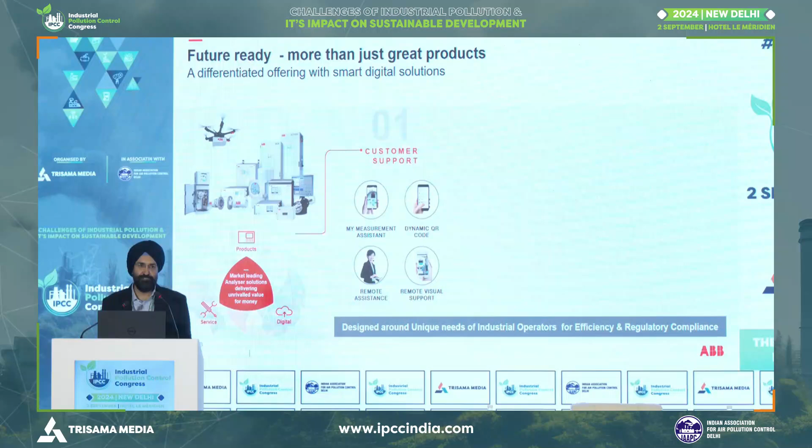You could dial into the equipment and do the diagnostics. There's a measurement assistant which uses generative AI in the background. You have a problem, just type it there, it gets you the solution from all our expert manuals which are existent there. So you don't have to make multiple calls. So that's one step in customer service.

Go on to data-driven solutions. We have talked about emissions. There is also a terminology called PEMS, not like CEMS, predictive emission monitoring. We also do that. So it should be part of the regulation. A lot of countries have this where you do not have to install a device, but using softwares, neural networks, you can predict what the emission data is going to be. So that's part of our data-driven solutions. We also have the leak detection I'm going to talk to you about, part of the digital solution.

And moving forward from a reactive to a preventive to a predictive mode. This is where the world is moving. This is where the solutions we bring to you are. We are headquartered in Bangalore. We build our assembly lines for sensors, pressure, temperature, instrumentation.

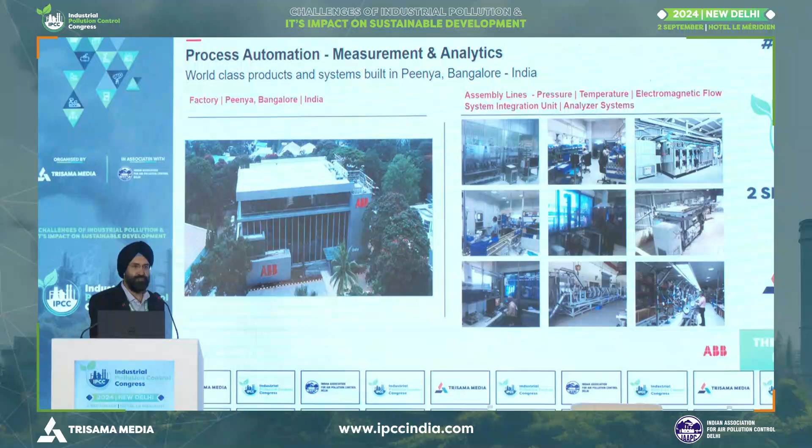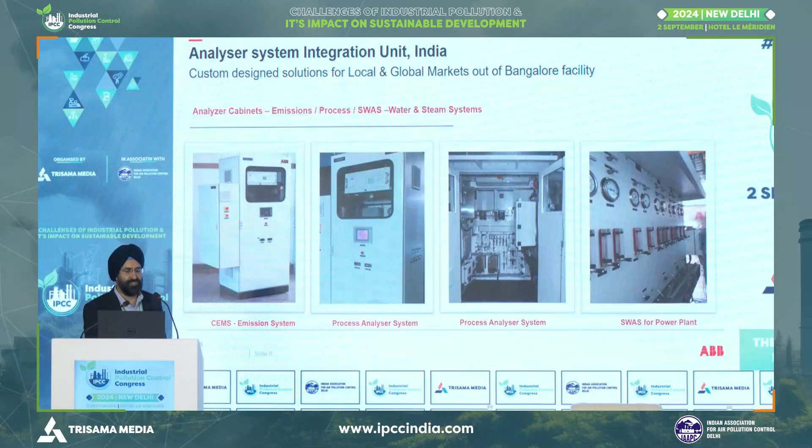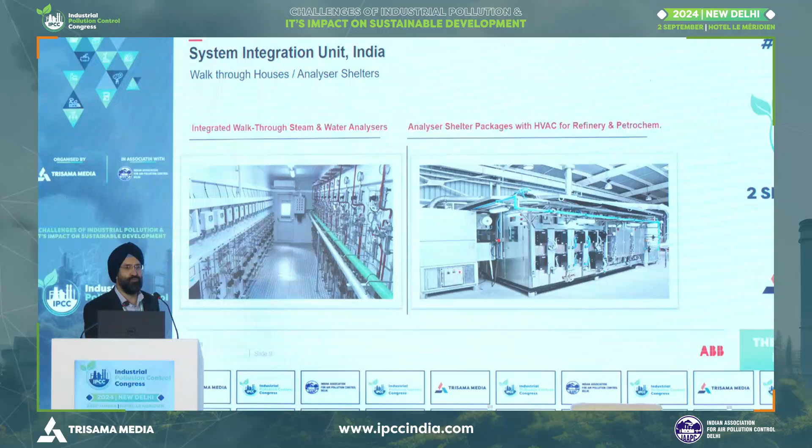We also do the analytical assembly line, typically very custom designed. Let's take it, an emission system in a cement plant or a steel plant is totally different than what would be in a refinery or petrochemical stacks. So we do across there, extremely customized. We build process analyzers, liquid analyzer systems, walk-through shelters for refineries, typically petrochemical complexes and fertilizers as well, and water analyzers. So those are the solutions which are there.

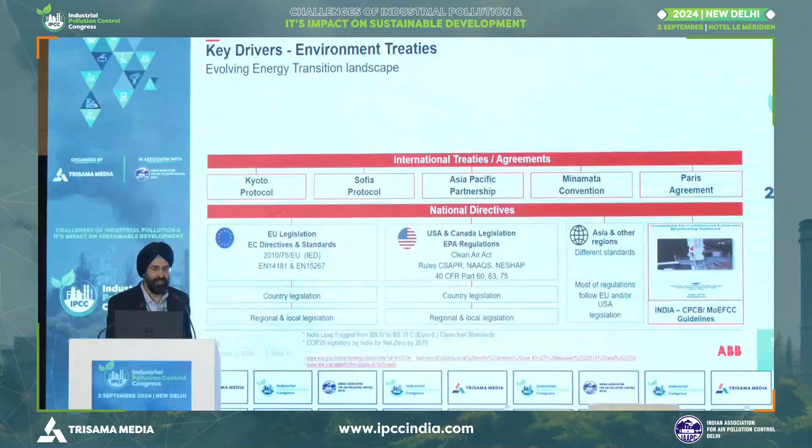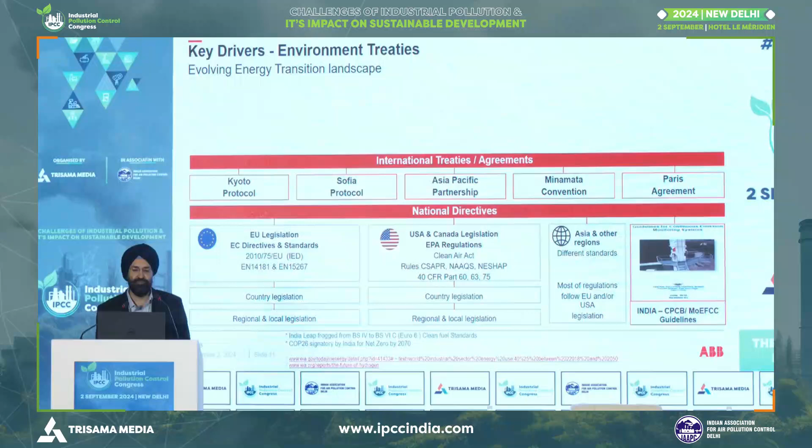On to the key drivers and the context. These are extremely important because that's how you decide where to put your money in and how to stay sustainable in the marketplace. We've heard a lot about the Kyoto Protocol, Minamata Convention. I think enough has been spoken today, and very rightly, I would say very good context happened in the first half.

These are all driving international regulations. For example, the EU norms adopted by many countries, US EPA norms. CPCB has come out with a guideline based on those. A lot of changes have happened, like leapfrogging into BS6, for example, cleaner fuels. And right now we are going through a cusp of energy transitions, all towards net zero, cleaner fuels, reducing our carbon footprint and so on.

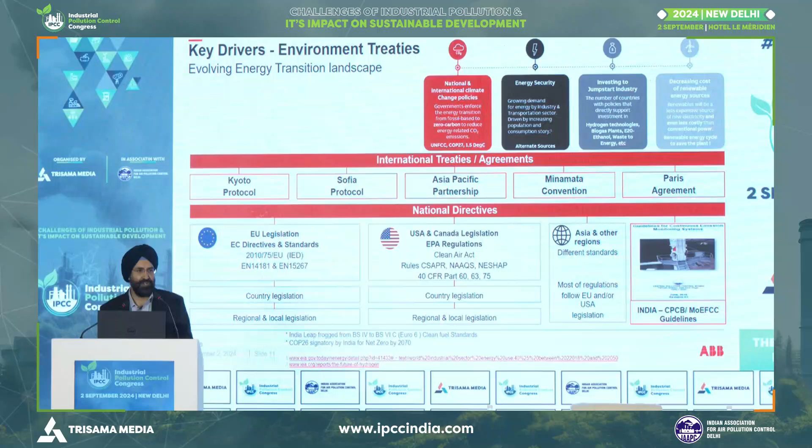I would like to bring you another very interesting aspect of what we do with our optical sensors. Not too many of us know that we also make optical sensors for space. Today, we work with all the leading space agencies with our optical sensors. So a satellite moving up is probably looking down onto your asset and able to pick up how much methane you are releasing or how many other gases you are releasing.

Besides the known NASA, SpaceX, European, Japanese and so on, there are a lot of private satellites which are releasing targeted satellites for methane detection. Now, why would that be? I think the climate scientists have figured out that methane is a bigger culprit than just CO2 and has a much larger impact on the heating in climate change. So we do both from space as well as at the earth level. We do the leak detection.

I'm going to talk about those methane detections. So basically a satellite is able to quantify the leak, look at the fingerprinting where exactly it has happened, and fundamentally, we have to be very honest in what we are reporting. There are no borders, no boundaries, and basically no place to hide.

So on to the problem statement on the city gas networks. Besides the revenue loss of leaking gas, I think the key focus area which I find from all users is safety and risk avoidance. And there are a lot of reasons behind it. Very typical things besides the conventional aging process and the bad PR associated with an explosion or a casualty and so on. I think there are multiple agencies also involved.

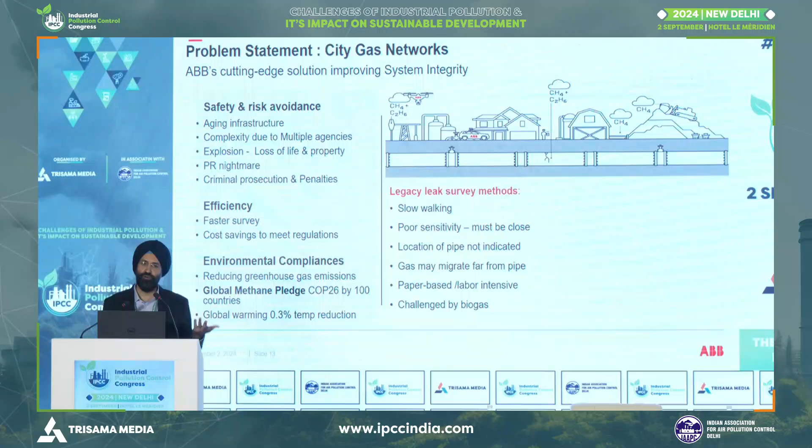Right now, we have a very slow process of a handheld device to go and look for leakages, typically methane. And when you look at this methane in a process pipeline, you have a higher concentration. Close to it, you still have ppm levels. As you go beyond, your concentration of methane goes down to parts per billion levels, if not ppt levels. So these are some challenges from a very manual-oriented approach to a very automated approach.

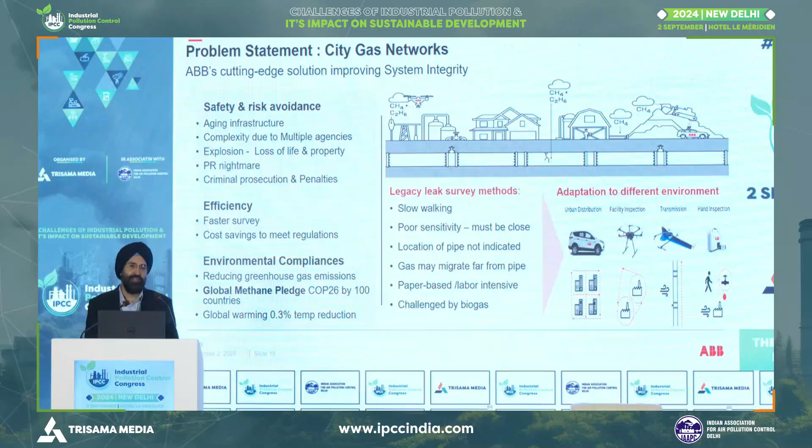Now, these solutions are very adaptable depending on what the applications are. If you are a particular asset, then you could do something with multiple sensors there. If you are on a vertical building or a trunk pipeline, you would require a drone or airborne solution for it. And for a handheld inspection, like pinpointing, you have a handheld device to do it. So the current situation is we're doing the walk the line. That means you walk the pipeline to look for leakages.

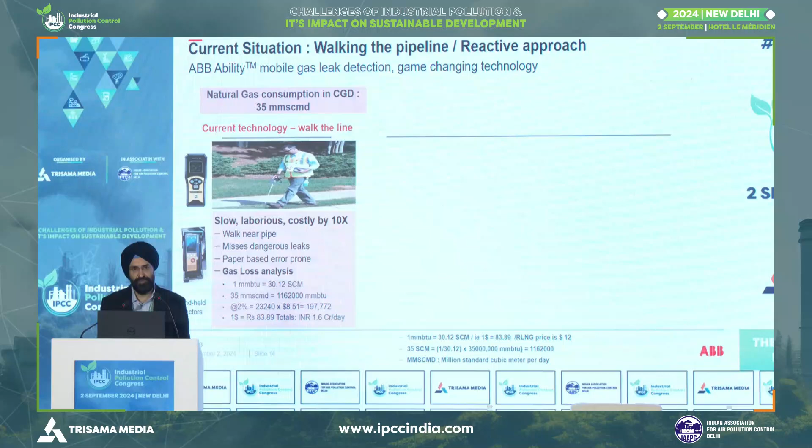This is very slow, very expensive, very labor intensive to do. And these are some of the devices I put, which you see on the side, which are the handheld devices currently being used. They are not as sensitive because they look at ppm levels and cannot go down in the ambient much lower. If you look at the total capacity of consumption in city gas, we have about 35 million cubic per day is the consumption.

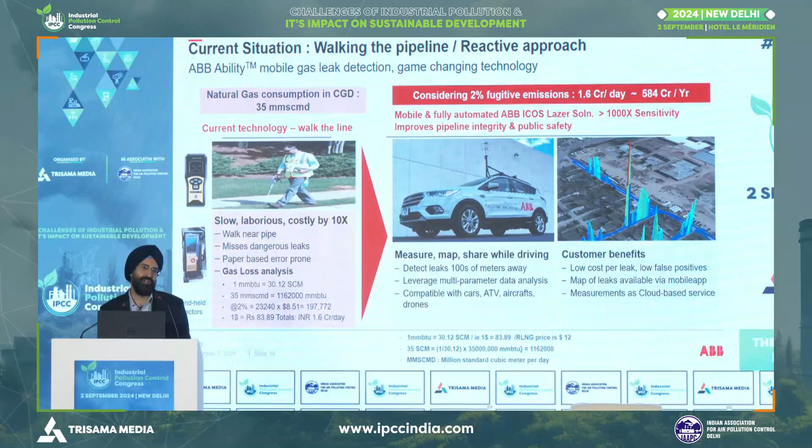Calculation wise, even if you take a nominal 2% leak, you are looking at a 1.6 crore loss per day. On an annual basis, it's about 580. Even if you halve this percentage to 1%, it's a huge number. And besides the losses, we are looking at an environmental impact which is not reversible in many ways. So we have got into a very mobile platform of measuring. You can drive at a much faster pace, cover a larger distance, and get completely automated reports out of it. We'll discuss that later.

On to the technology, the off-axis integrated cavity output spectroscopy. This is a very advanced laser technique. In fact, there is a general perception in the market that the laser is going to replace many technologies because it's very precise, hardly any maintenance, and it can go down to very low sensitivity levels as well. I don't believe it's going to replace everything, but it is doing so in a lot of applications. So on to the technology.

This got acquired by ABB in 2013, a company called LGR, Los Gatos Research in the US. It has a patented technique of measuring using optical spectroscopy. In any optics, the Lambert-Beer law is the fundamental. Lower the concentration, larger the path length you require to have a sensitivity of measurement. This particular technique is very simple. In a vacuum chamber, you have very reflective mirrors. We're able to convert the optical laser up to 25 kilometers path length and go down to parts per billion or parts per trillion level of sensitivity.

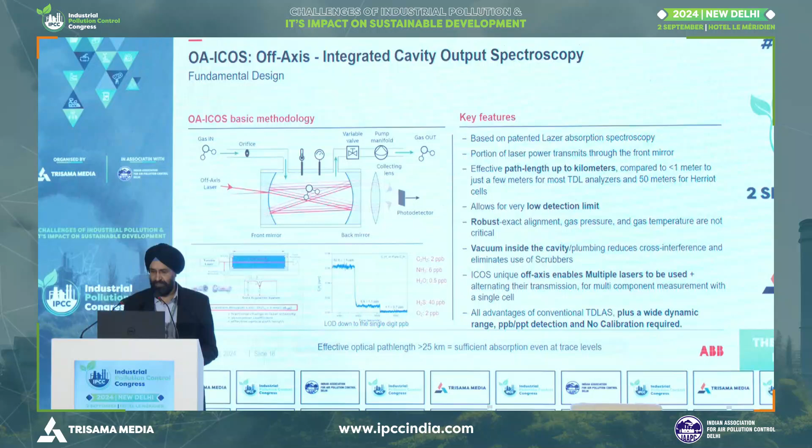So a lot of applications like hydrogen cyanide, for example, which I personally felt after all these years were not possible to measure because of signal to noise ratios, drift rates and background interferences, are today possible. So this is in a very simple way without making it very complex. This technique is very versatile. It has been adopted in climate change for decades now, and we have adopted that technique into the industry.

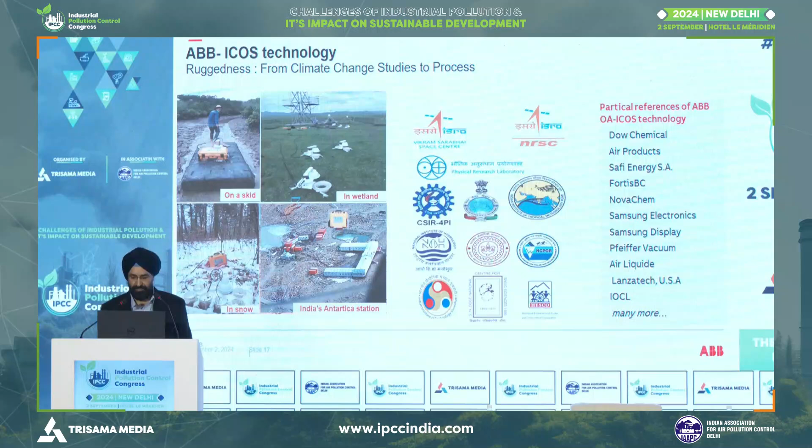Many cutting-edge institutes like ISRO, CSIR labs, IITs are using it for climate monitoring of greenhouse gases, typically methane, CO2, nitrous oxide, even carbon isotopes and nitrogen isotopes. In hydrology research or glacial research, you use triple isotope water isotopes to monitor. So there's a lot of study going on. The world has already been doing it for years. We are also doing it here in India, and we are very much a part of it. This technology is now adopted by many licensing companies in the refinery petrochemical side, and very well established there.

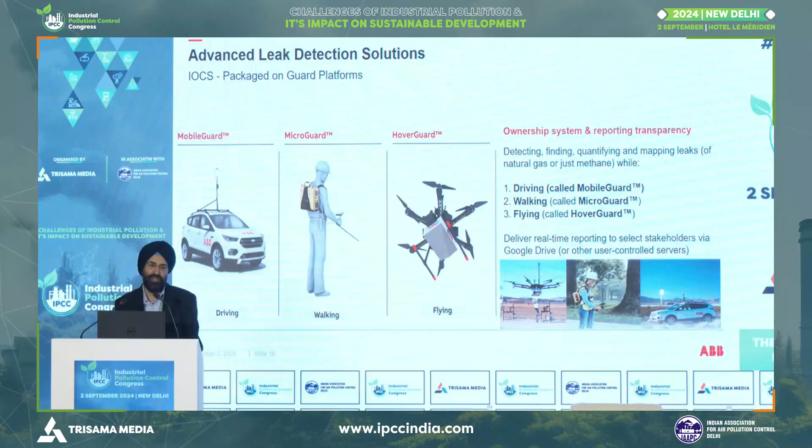On to the detection solutions, we have 3 platforms. One is the Mobile Guard, which you can drive with. The handheld or backpack one is the Micro Guard, and the drone based one is called Hover Guard. The Mobile Guard is typically for an urban setting where it may not be feasible to run a drone and you could drive it around. So what is it based on? We've seen that the analyzer is extremely sensitive. It goes to ppb levels.

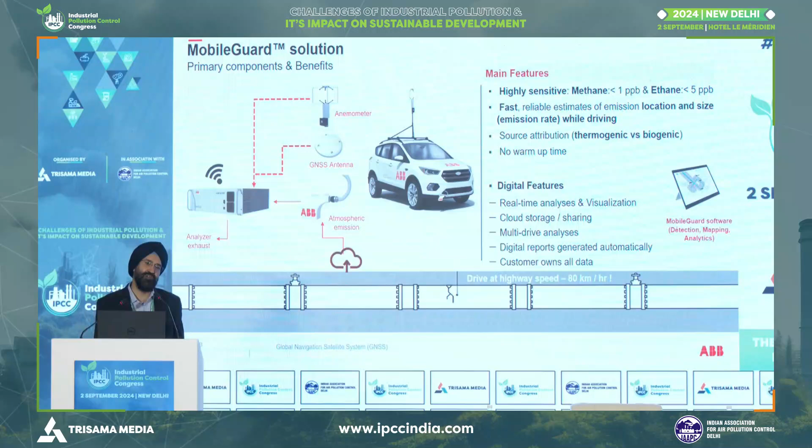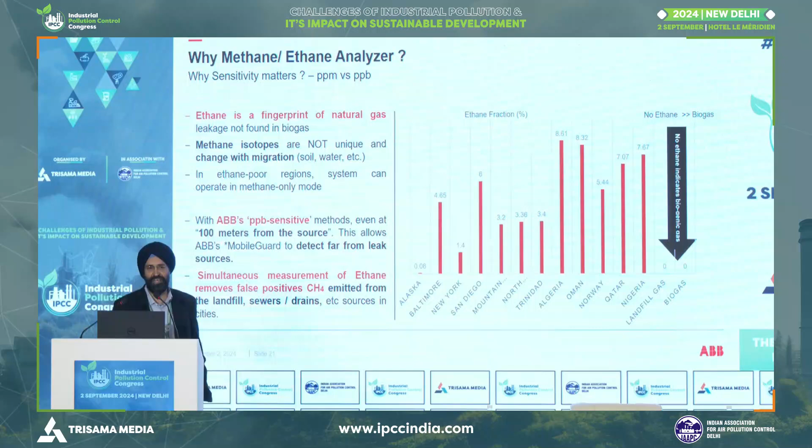Along with that, we're using data analytics, picking up data from the anemometer, which is the wind velocity and the wind direction, the GNSS location from satellites, and sucking the gas from the atmosphere. All these 3 are able to go down to 1 ppb levels of methane, 5 ppb levels of ethane. Now you would wonder why ethane? It is because generally in urban settings, you have a lot of methane floating around. We have done pilot studies here. Every sewer line, every drain is releasing methane, and you wouldn't know where the methane is coming from. So ethane is a fingerprint for natural gas, unlike biogas. So we're very clearly able to identify what gas we are measuring out of methane.

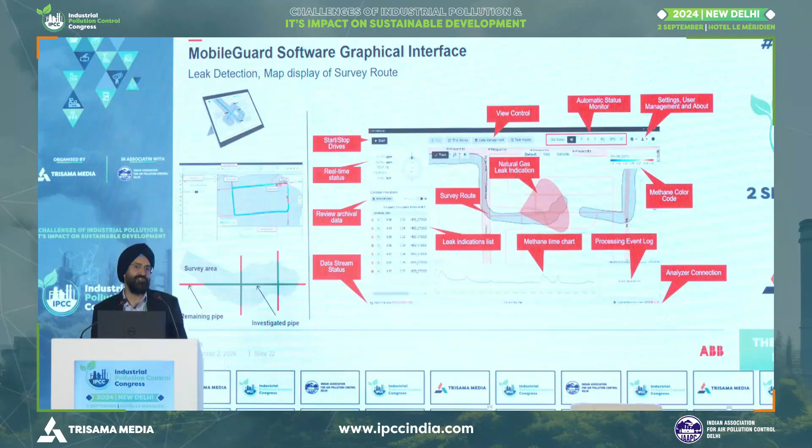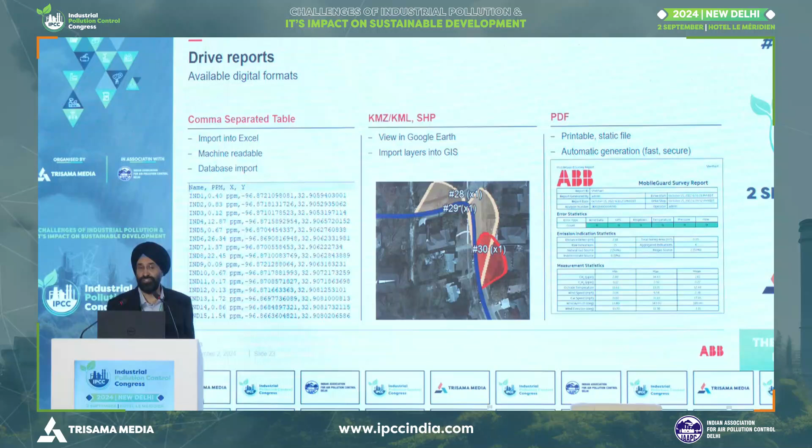So while we are using data analytics during the drive, you can get all your alarms, you can plan your drives, you can also look into areas where you find more likelihood of leakages and problem areas. And everything is instantaneous. So you get your reports in digital format, you get print reports, you also get GIS files. So if you have a GIS network of pipelines you don't want to share with us, you could superimpose the KMZ files and KML files or shape files in your GIS and know exactly where the leakages are taking place.

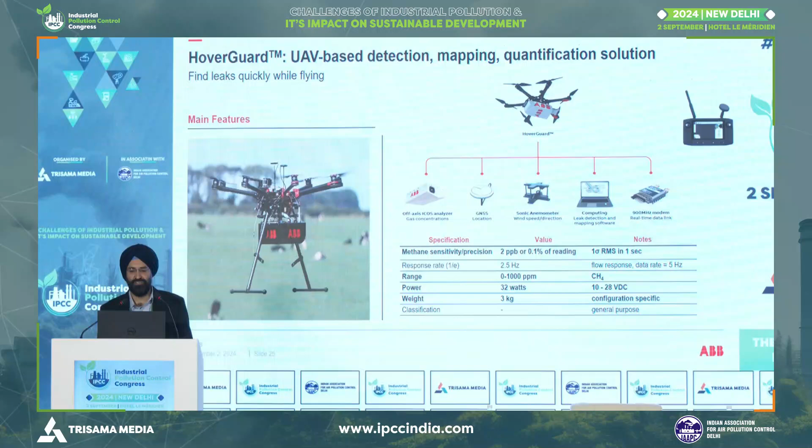On the drone-based solutions, this also uses the same concept of data capture. It's a miniaturized version of 3 kgs only. Smaller drones can fly it. You could plan your routes. You could get a heat map of where the leakages are happening, and then you could pinpoint it using a handheld device, which could move on to the site to know where the locations are.

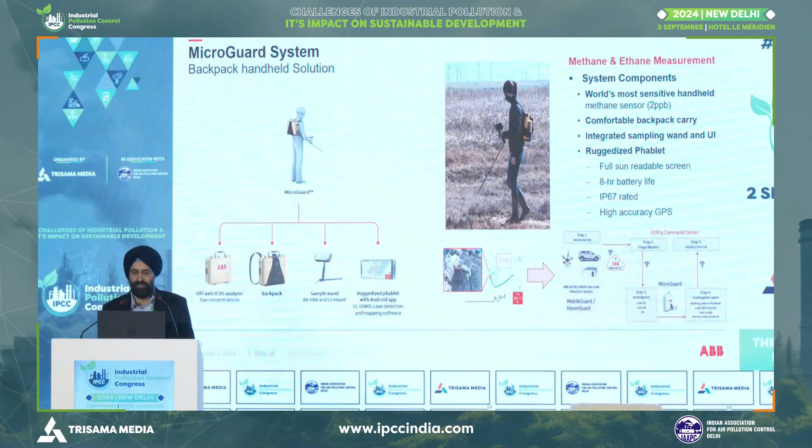The handheld device also measures methane, ethane, so we know we are on the same platform. This data, as you can see, is going into your SCADA network or command center, where you can take a quick reaction team and then also decide what to do about it. I have a small video to run, and this is how I will just conclude it.

Audio, please. I'm sorry, there's no audio. So let me chip in there.

You're not able to see it. I'm so sorry. Okay. Okay, thank you.

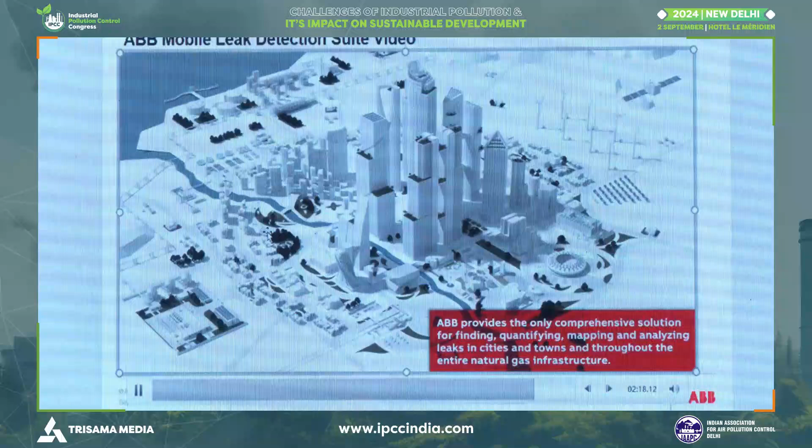Thank you, and I have just a few slides of some of the projects and milestones that have been done. Just want to share those. Just 1 minute. This is the global footprint of how this technology has been adopted across the globe, from the Americas to Europe to Japan. In fact, this year the Japanese Prime Minister awarded the team which implemented this solution.

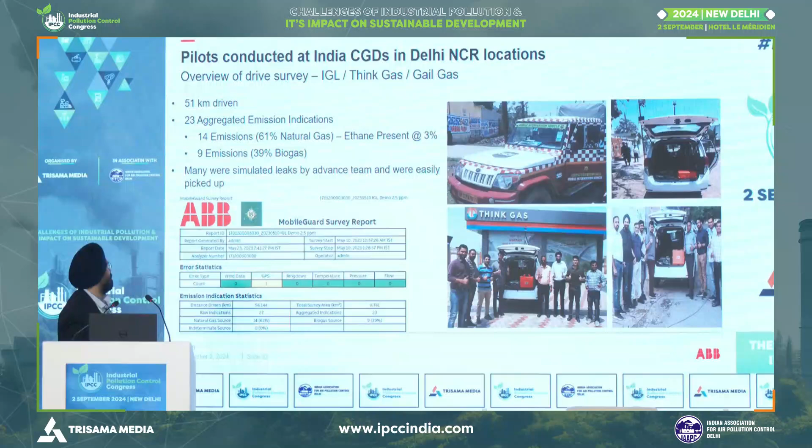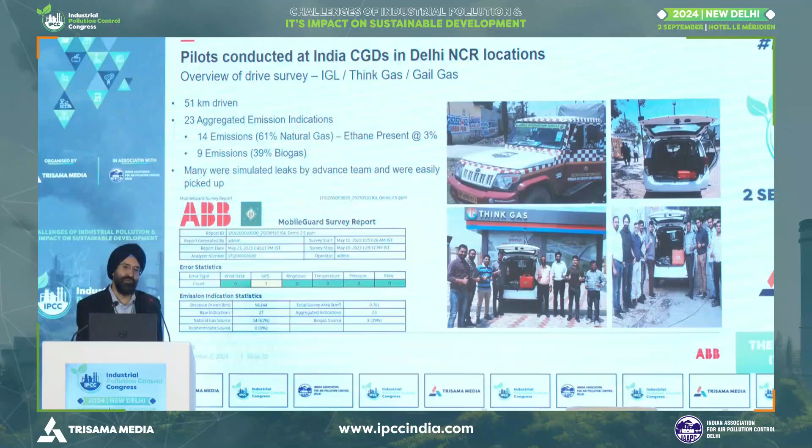And so basically the methane pledge is the driver as per the regulations to mitigate. 100 countries have signed up. So this is where it fits in. This is a pilot study we did with 3 gas companies, IGL, Think Gas and Gail Gas. You can see 23 emissions were detected, out of which 9 were biogas related. If you had a handheld device, you would never know. You would just be digging up or looking at what. So the unseen is what is getting captured right now here.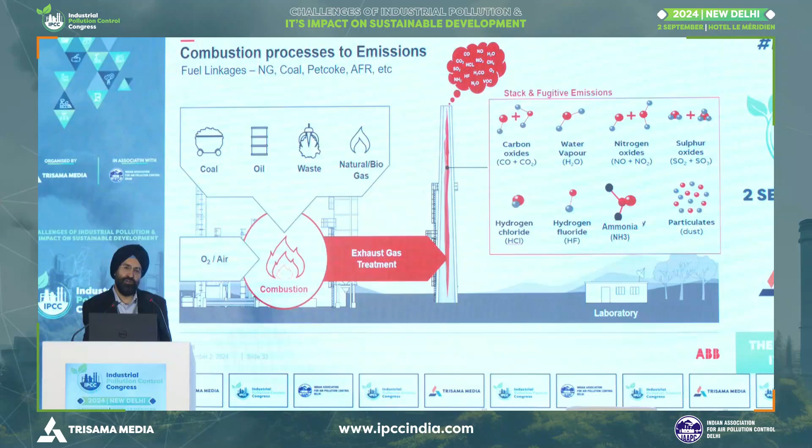A lot has been talked about the emission side. I think in the transition, a lot of fuels have also been looked at in terms of combustion. If you look at municipal solid waste, it is one area which is being looked at in incineration for waste to energy. Typically, conventional gases are SOx, NOx; you now have HCl, HF, TOC, ammonia all coming out. Not easy to measure with conventional technologies.

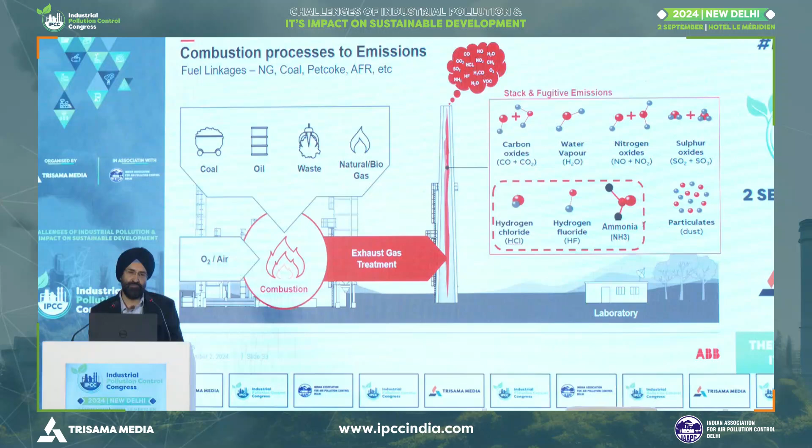I would like to share, NTPC team, I'm not sure whether they're here or not, a project which we implemented with NTPC in Varanasi, a flagship, the first project of municipal waste into green charcoal. NTPC spent a lot of time to understand how it worked, and for the waste to energy, they took the EU guidelines where the best available technique is FTIR spectroscopy. So 10 gases are being measured simultaneously in the stack.

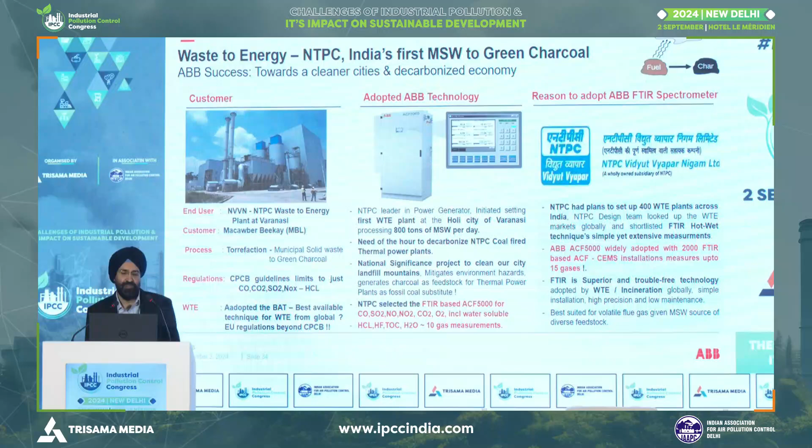Tejbir, we have limited time. Okay, I'll just wind up.

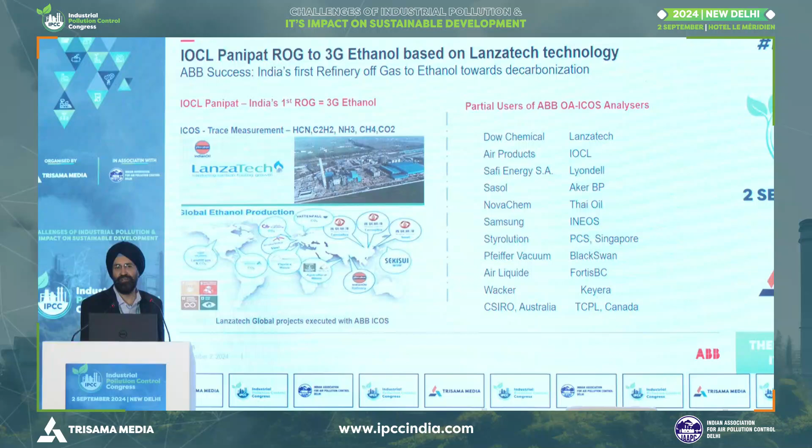So hydrogen cyanide, I just want to cover this. We have done this in IOCL Panipat for LanzaTech, which is measuring the refinery off gas, capturing it into biodigesters, and this process is measuring all trace level impurities. So this is my last slide. Many projects, including the coal gasification and the carbon capture project. Thank you very much. Sorry for the extra time.

Thank you very much. Just like an apple a day keeps the doctor away, adopting new and innovative technologies by industries, MSMEs and various people can keep the regulators away. So I'm sorry for this, but yes, of course, we need to adopt new technologies, innovative technologies. We have to see the future of emissions, how to control these emissions. So